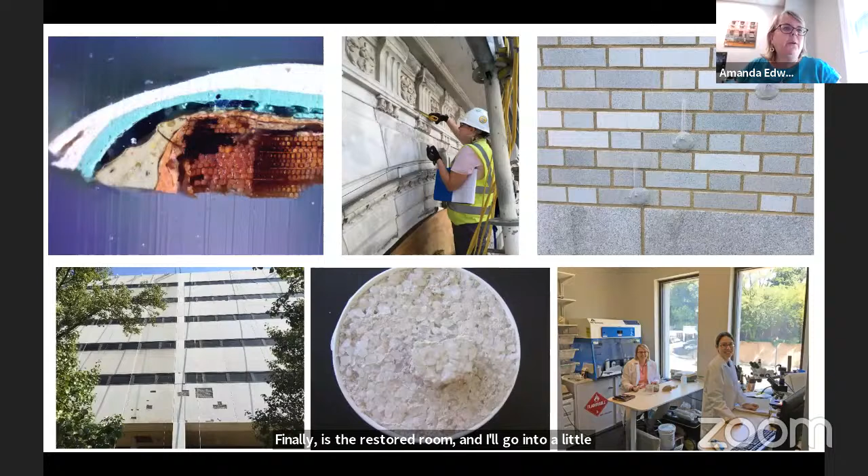So what kind of testing do we do in this hands-on investigation? Paint analysis is a fun one, and I'm going to give you an example of one of those projects where we're taking little cross sections of wood trim or various plaster elements to try to understand the history of paint and what the room could have looked like when it was first constructed.

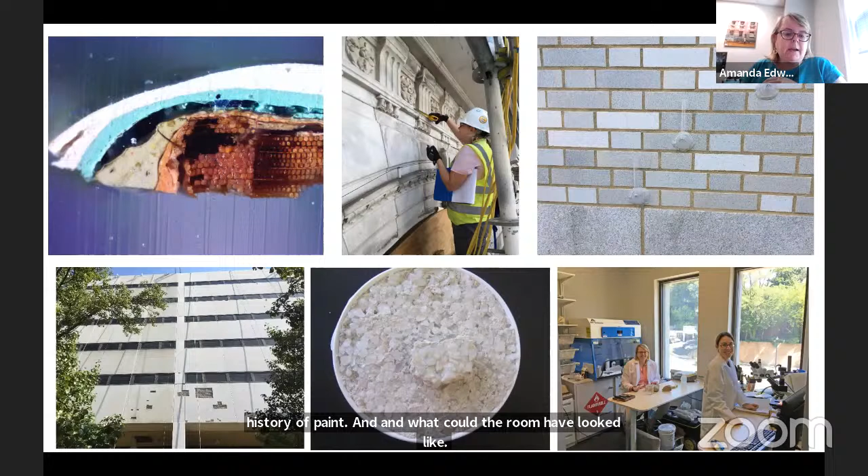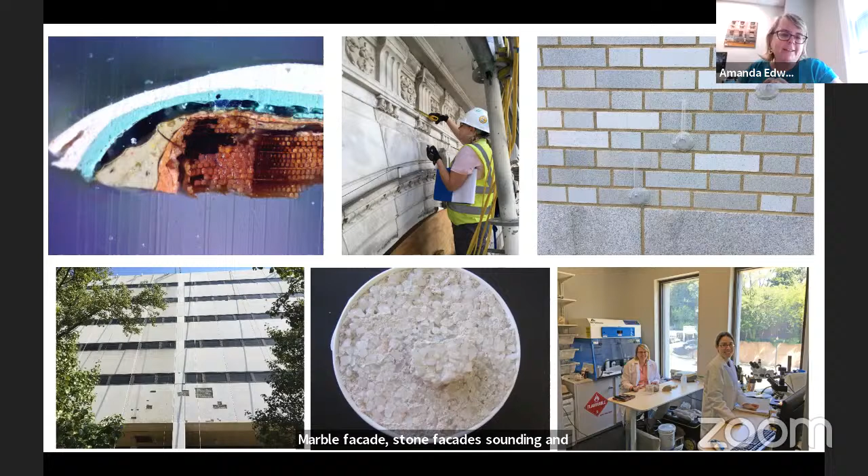We also do a lot of building survey, so I'm out on marble facades, stone facades, sounding and counting cracks, as they like to call it. We also do things like RILEM tests, where we're looking for permeability to understand how that mortar functions within the wall, how the bricks are functioning within the wall.

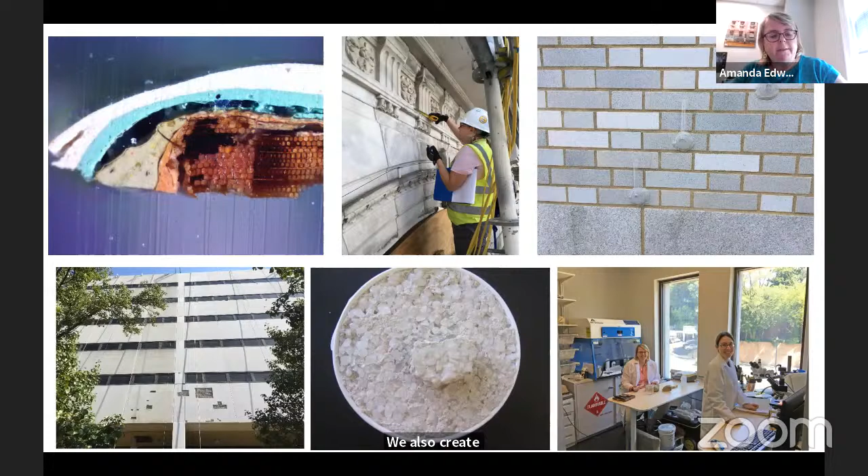We also create patch protocols. So this in the lower left is an example of an exposed aggregate building, and we were able to create a patch that matched it almost exactly so that you couldn't see all of those interventions that we had to make. And then I'm lucky that we have our own lab, so we can do some of this in-house, in our everyday office.

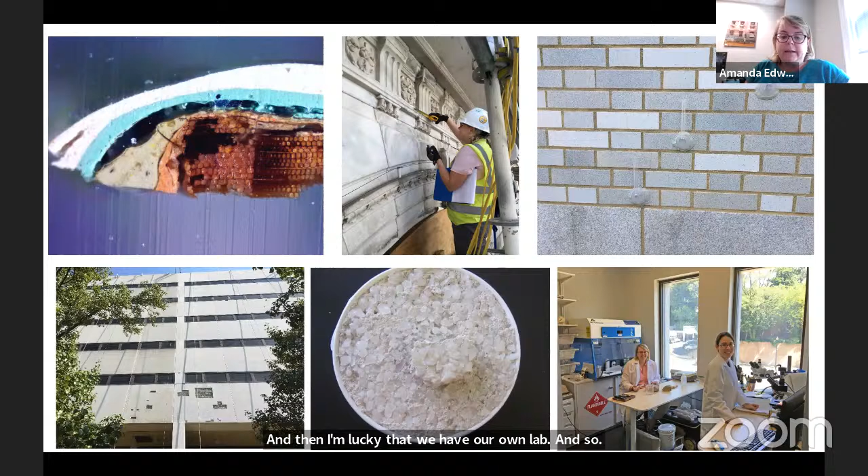So I wanted to start off by being local to Arkansas. The preservation director in our office is from Arkansas and has brought us out there to do a couple projects.

Leonard Wilhoff had worked as a baker in Van Buren, and the house that we were able to work on was a dog trot house that we think was constructed somewhere in the 1840s.

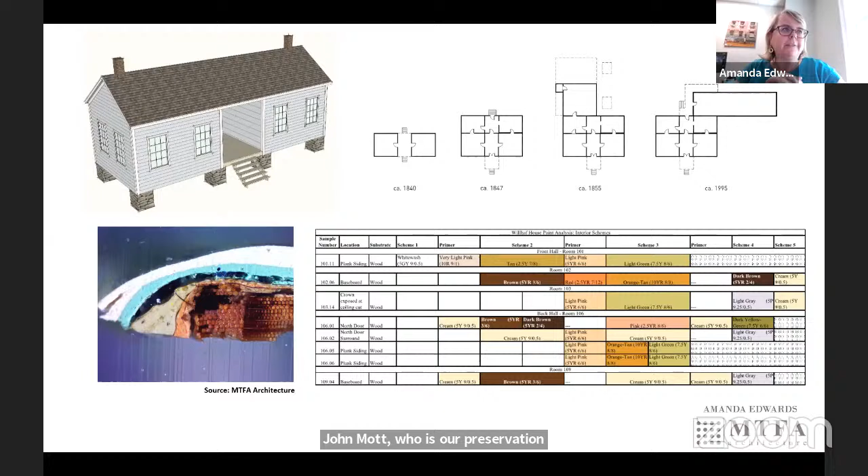So John Mott, who is our preservation director, worked tirelessly to try to understand the evolution of this building. And he asked me to do the paint analysis, which served a couple of different purposes. One was to try to figure out this evolution.

We were able to use paint layers to try to date whether these two rooms were contemporary with each other. Did they have different paint that told us that maybe one was earlier or one was later? And then also the paint analysis would help inform what the building's original design might have looked like.

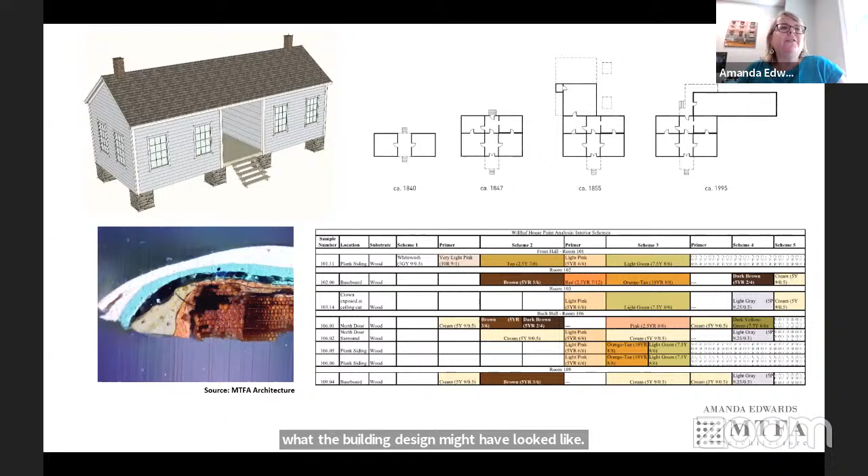So there was a complicated evolution from 1840 with the true dog trot. Then there were additions that were put on, and then even further in 1855, there was an L added. That L was removed, I think, in the 1950s. And then there was this other parallel L that was put on in the 90s, which has now since been removed. But looking at the paint analysis, I want to show you, let's see if I can get this to work.

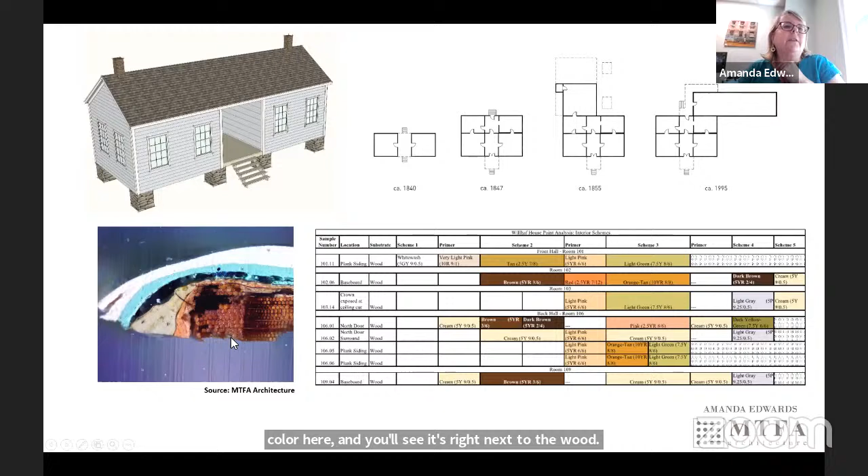Point you to this nice bright pink color here, and you'll see it's right next to the wood substrate, helping us understand that it's perhaps one of the first colors that was used on the building. And then here you can see the different schemes that we identified for various elements.

So this is what the restored building looks like now, and yes, it is that bright orange color. This isn't the earliest color, but we felt that it reflected the color of the building when it was in its current form—so probably about the 1860s, when it got to this shape. That's just a fun example local to Arkansas that I thought I would share.

So talking a little bit more about paint analysis, because this is fun. The process is really, you go out and take little samples from different elements, whether it's wood trim, plaster, brick, or whatever needs to be analyzed.

We mount them into these resin cubes and polish them, and then we look at them under the microscope, and we're able to define the different stratigraphy or layers. From there, after you look at a bunch of them, you can try to decide if there's something unusual, any kind of decorative treatment that we might want to see. And if there is, then you would do an exposure window where you gently scrape away the paint and try to see what that original finish may have been.

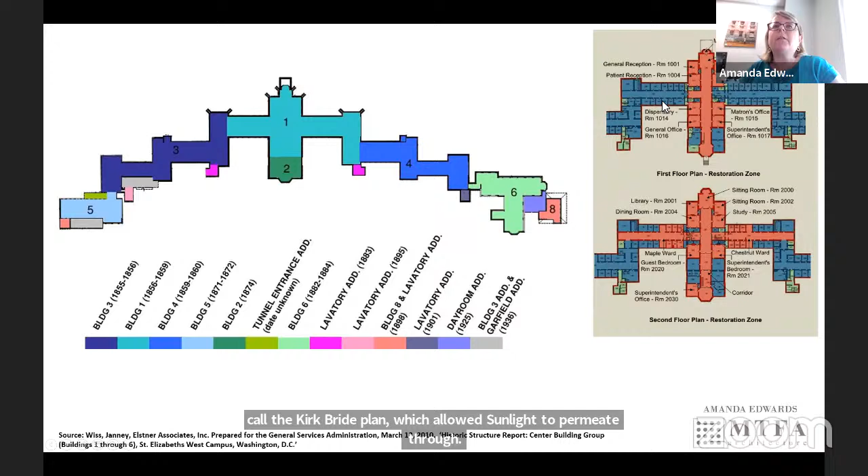And here's this footprint, and it has what they call the Kirkbride plan, which allowed sunlight to permeate through all of the wings. Each of these little rooms are patient rooms, and so it was seen as a way to provide a comfortable environment for all of the patients.

But the Department of Homeland Security says we can't have that many little offices, and it was also determined that the existing structural system couldn't withstand the new program they wanted. So here's the evolution of the building: it started in 1855 in Building 3, then Building 1 by 1859, to Building 4 in 1860, back to Building 5. Then in 1874 this new end of the building was added, and eventually around 1900 the full form was developed.

So all of the preservation regulatory agencies got together and said, okay, if you can't use the interior of the building, we at least need to save the shell. And this is what happened: the entire exterior was preserved and supported while the interior was completely taken out.

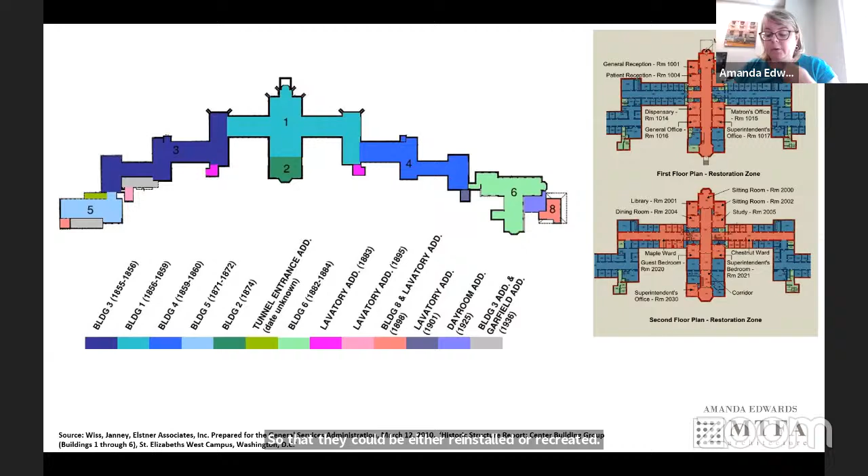Going back for a second, my job was at this intersection of the building, designated in red as a restoration zone. My job was to help remove all of the historic trim, doors, and windows, and to help understand the different plaster finishes so they could be reinstalled or recreated in this zone. Part of that was doing a paint analysis so this section of the building could be repainted to match the original design intent.

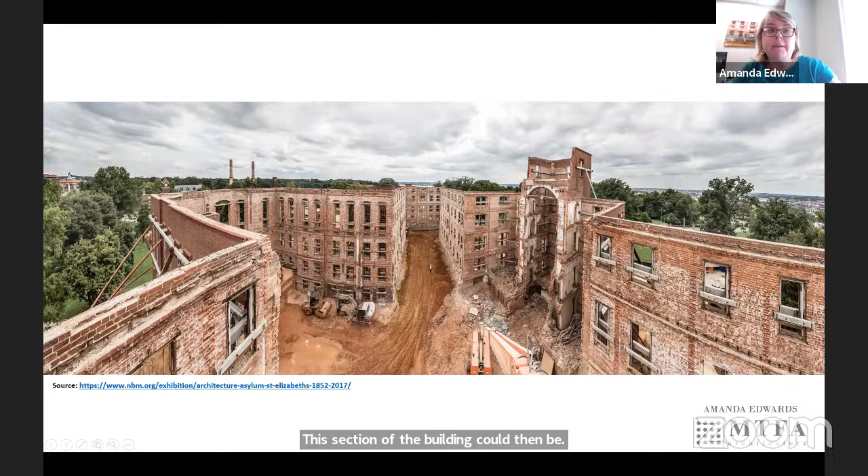So it was very overwhelming, a little daunting, but we had a little help. There are great photographs from 1905 that showed what the interior of the building looked like, and you can notice areas of stenciling and wallpaper. This is what the building looked like when we did our survey and paint analysis — it had been boarded up for many, many decades at this point.

So we started on the paint analysis, and there are a couple things I look for. One is a benchmark. This part of the building was done around 1859, and this one in 1874. But these inner samples from Building 1 and the outer samples from Building 2 lined up almost exactly, which showed that none of the original finishes from 1860 remained in this portion of Building 1. So we knew everything we were looking at dated to at least 1874.

In other parts of the building we found a specific primer with red and blue bulking agents in it, which we didn't find in the 1874 building. That helped us identify that this was older, perhaps related to the 1859 finishes. And indeed, you can see this primer and then the brown of the stencil from this area — so we know that was an early finish.

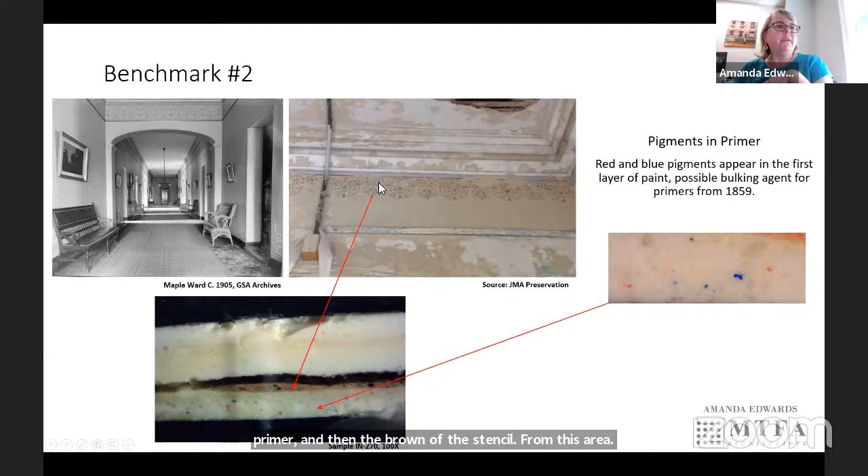In some of the rooms there was a lot of decoration, and the remaining paint and fragments showed different eras — we had stenciling, wallpaper, and full flocking of the walls. This paint sample shows all those layers: the blue stencil, the wallpaper, and this red layer. All of these things, with the help of the photographs, helped us understand what we were looking at. This wallpaper dates to the era seen in the 1905 photographs — so those are some of the things we use to date our analysis, which is pretty cool.

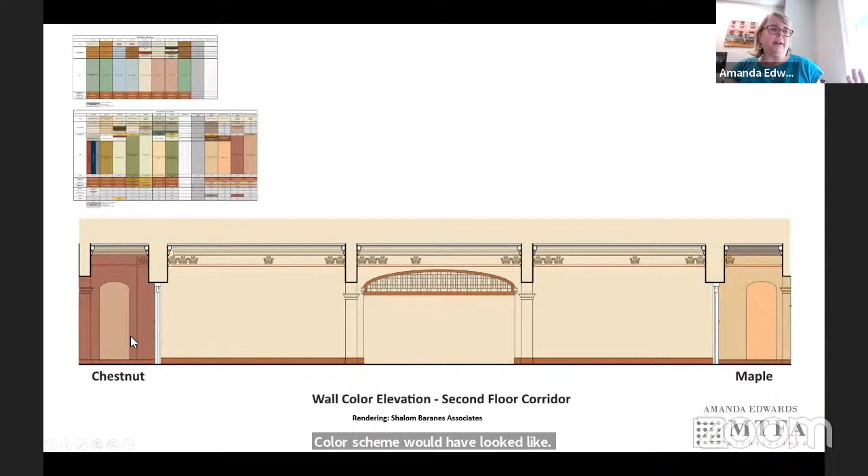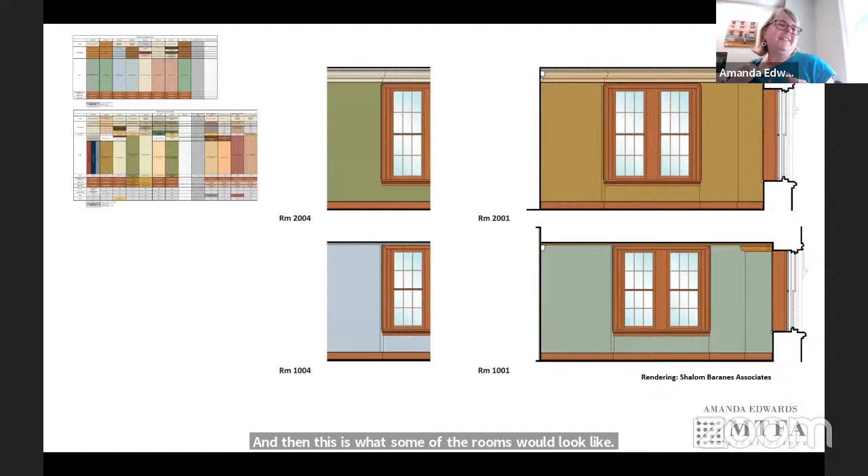Okay, I'll speed through this part now. We got all the color palettes for that center cross of the building from 1859, and each reflects different rooms — focus on these pink and mauve colors here. This is what we determined that color scheme would have looked like. Each wing had a different color scheme — this is the chestnut wing, this is the maple wing — and this is what some of the rooms would have looked like, these beautiful mid-19th-century jewel tones. Once you see it, it makes sense when you understand the trends of the time.

So, funny story — I was talking with my neighbor, who was a Capitol Hill staffer, telling her about this paint analysis and some of the things I was finding. She said, oh, they're doing some restoration of the Brumidi corridors in the Capitol.

You should come for lunch and we'll check it out. And I was like, oh, I would love to do that.

It turns out that T.U. Walter, who was the architect of the Capitol at the time these corridors were being painted, was also in charge of building St. Elizabeth's.

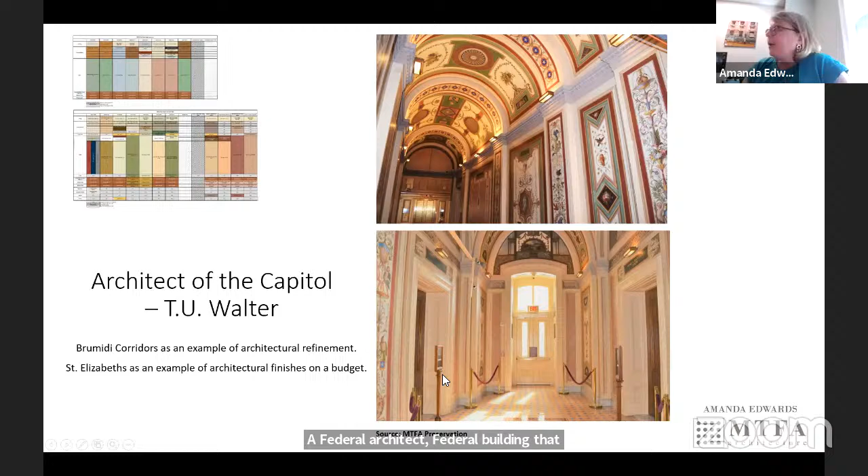What I determined, because I had done the paint analysis at this point, you can see these pinks and mauves and greens and blues, and when you look at what was done in the Capitol, it's all the same colors, just a different level of refinement. So this is something done with great artistry and flourish in one of the most important buildings in the country. Then you take those same colors and do a simpler version for a federal building that was done on a budget. I think there's probably a lot more to unpack there, but I thought that was really interesting.

Some more samples that we found. This is the exterior. This is a sanded paint that was intended to look like stone. We determined it was found on all of the trim and the cast iron, and we were able to recreate that finish in our lab. This is what the final product looked like, and you can see how close it is to the true brownstone trim that exists on the building.

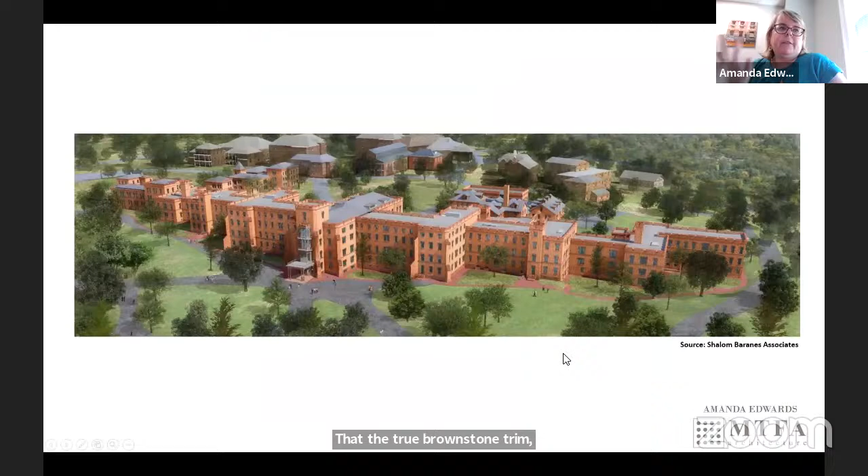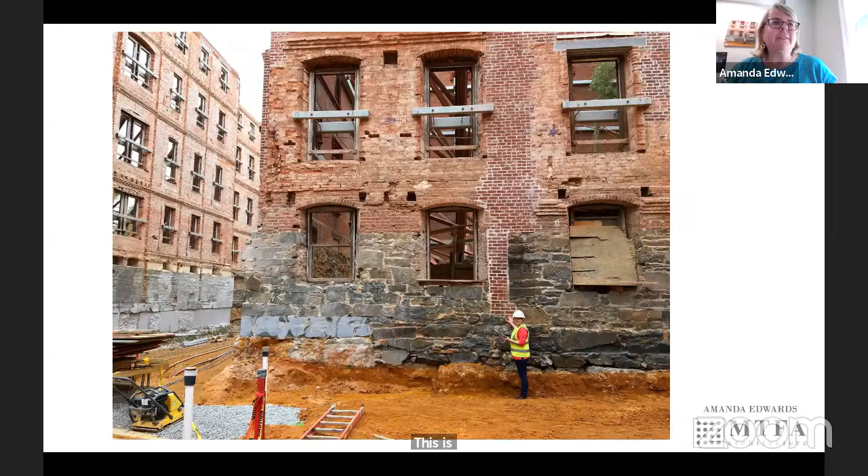Okay, now I'm going to talk about a different project, one that's close to my heart. This is the Folger Shakespeare Library, a project I've been working on for a number of years. It's a stripped classical building, designed by Paul Philippe Cret in 1932.

We were contacted to help clean the exterior of the building to get rid of black staining around the perimeter. We had lots of different theories. It turns out there was lead-coated copper flashing at this level. The lead had worn off and the copper was exposed to the elements, so the black stain you see is actually all copper. It can turn purple over time, starts out green like everybody knows, but indeed it can turn black.

So we did a really intense hands-on investigation to understand how we could clean this building, and how we could do it over the entire building, not just one little area. We started out with poulticing, which would be the common approach, and we got zero results. Then we tried misting to open up the pores of the stone so it could receive the treatment better, but it still wasn't doing everything it needed to do.

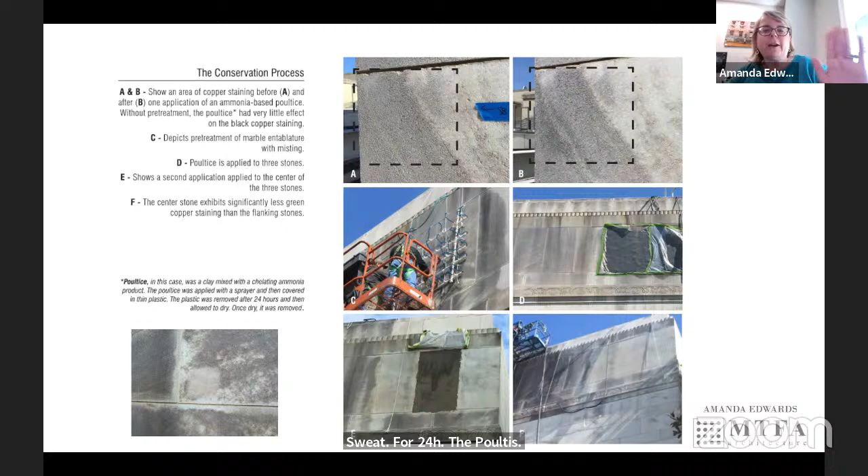From that little tiny square, I said, okay, I think we can do this. Then we started to apply it to the whole building, and created a spray system for applying the poultice material. We determined it needed two applications, needed to stay wet for 24 hours covered, then we needed to take it off and let it dry for 48 hours and then do it again.

Here you can see the success, this is a cleaned area and this is the stained area. We were really able to get it all out, and it was just incredible. These are some of the photos of our different levels of testing, trying all different kinds of poulticing chemistries to see what was going to work the best.

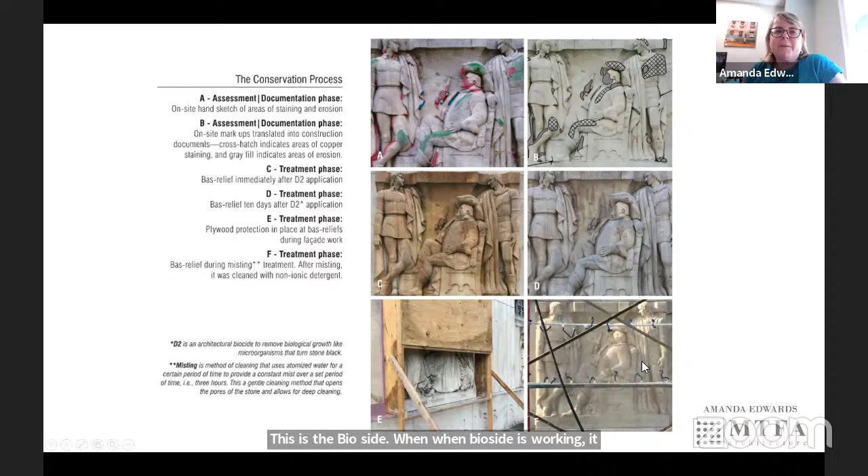And this is what the stone looks like under the microscope, stained and then cleaned. We also did some work on the bas-reliefs where they had been treated before and consolidated in various areas. All of this stone is Georgia white marble, and they were not this orange. This is actually a treatment - the biocide. When biocide is working, it turns bright orange, but eventually it gets to be clean. So don't freak out if your stone turns orange when you put some D2 on it.

And this is the final result. So here we have the sequence: the historic 1932 image, the stain from when we started, halfway through where we realized that we had a winner on our hands, and then the final result, which was truly remarkable.

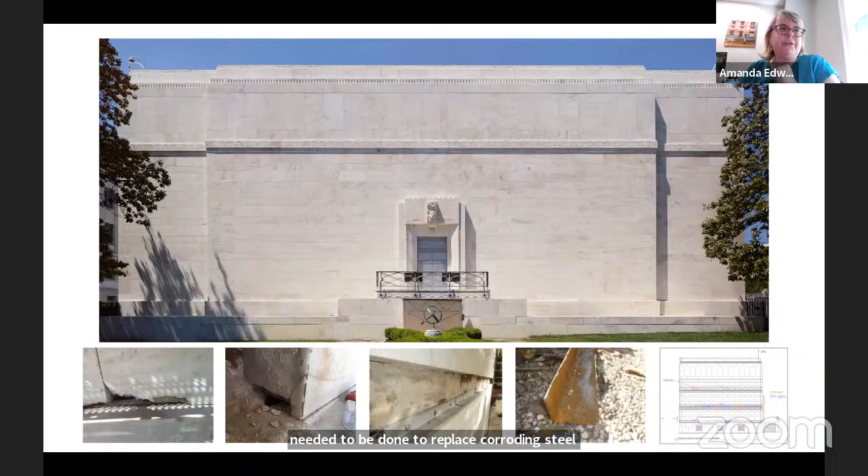We did a lot of masonry repair also. There was some work that needed to be done to replace corroding steel shelf angles, but that's almost a whole nother talk. You can't tell, even in this photo, how much strategic stone removal that we did. We removed whole swaths of this, but we put it all back in areas to match the existing coursing, and we salvaged as much as we possibly could.

So then, after we had the building pristine, the Folger decided to embark on their new museum project. So if I go back a few slides to this terrace, they decided that they wanted to open this space up for their new museum space and provide some accessible entries.

And this was really nerve-wracking because I had just restored this whole building. And then they opened up, they trenched this all out, and they were supporting the entire facade on these jacks. They did an incredible job, very little damage - I mean, no damage, but very little movement to the joints that we just repaired. Really an incredible feat. And then we put in this protection of the bas-reliefs so that they were breathable, but protected from any impact from the construction.

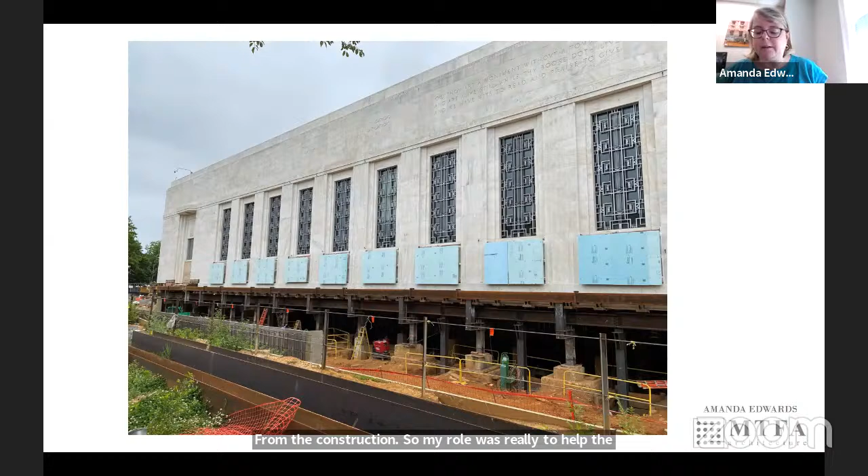So my role was really to help the owner protect the existing historic fabric. And one of the cool things, this is a close-up of those jacks, which is amazing.

One of the cool things that I got to do was go to Vermont and help pick out new marble for the terrace. The existing marble was not reusable for the most part, and we found a good stone match in Vermont. We went up there and selected different stone blocks based on their level of veining that we thought would match. And then once all the stone was cut to size, they laid out the entire terrace.

We also did a lot of work on the interior. The Folger has incredible Elizabethan inspired interiors, which again is a whole nother talk, and if you're ever in Washington, I encourage you to come visit. We did a lot of work on the aluminum and stained glass windows, as well as a lot of aluminum trim around the whole building.

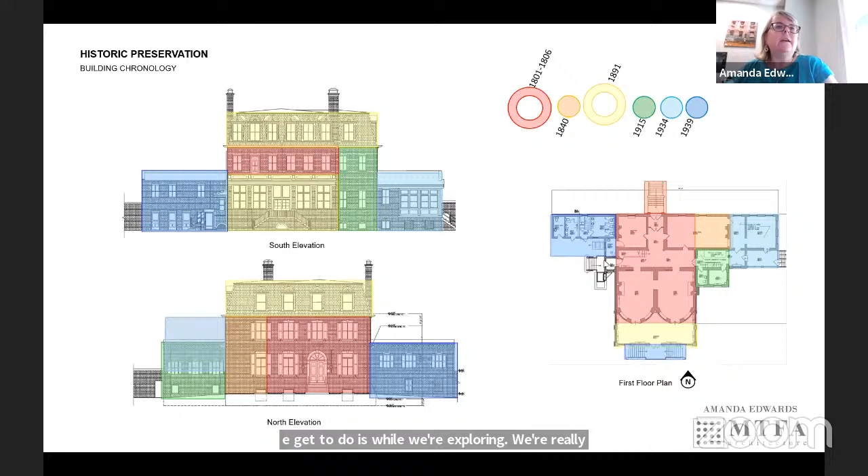So to get to the conservation part of this, we are in the basement of the building in that red historic core, and we noticed when we were investigating for all of the different upgrades that were going to happen to this building, that right above this ceiling tile, there was a lot of brick dust, an excessive amount of brick dust. Here, I'll show you the picture. Where did this brick dust come from and what was going on?

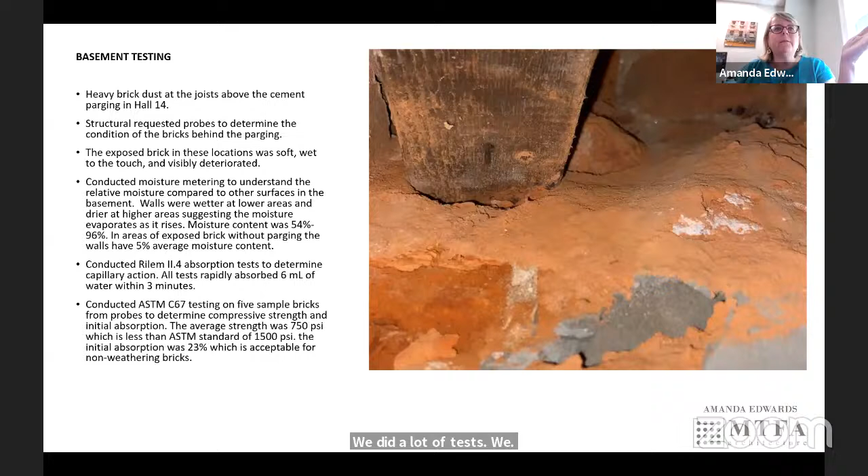So we did a lot of tests. We opened up the walls and we found that we had known that there was a 1-inch thick concrete parging that was put over these walls as a stabilization effort, actually, to help the structural support.

But what it was doing was actually trapping the moisture, and as that moisture was rising up the wall from the pressure of the coating, it was evaporating right at that ceiling height, where the first point where it could be released. So we determined that perhaps there wasn't really a water table or a damp course that was preventing the water from rising above the water table.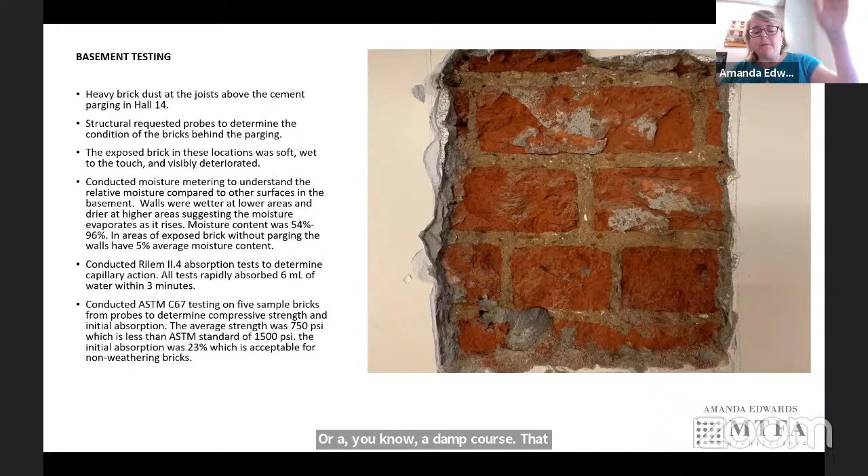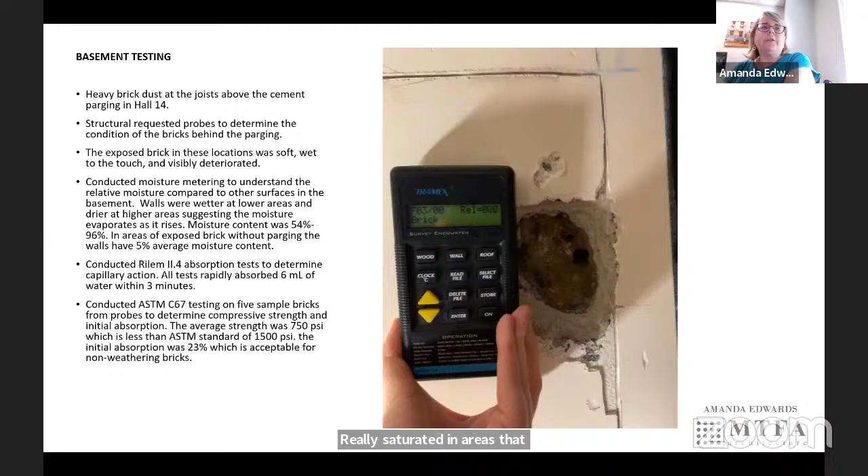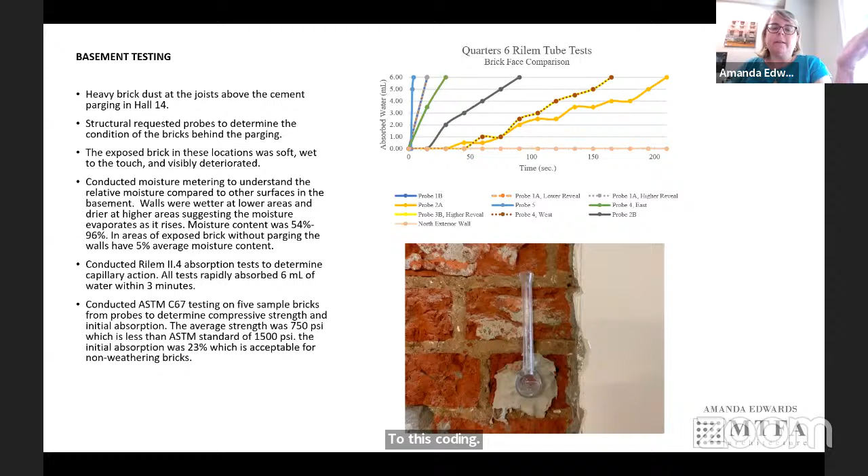We did moisture readings, and we determined that it was really saturated. In areas that hadn't been treated with the concrete, it was really dry. So something was happening that was related to this coating. We did absorption tests. These bricks are from 1801. They are highly absorptive, probably all hand molded, right?

So we wanted to do some geotechnical testing to try to understand if there was any clay under these walls, or what was the soil content at the foundations. And we indeed found clay, but we also found this, which was a cellar that nobody knew about, that had been filled in. And you can see some of the whitewash there on the bricks.

That led us to a whole nother set of diagnostics and conclusions that we needed to take all of this fill out, get that cellar open back up, and start putting some air in there so that we could dry out this wall, because we can't take off the parging, it would damage the brick.

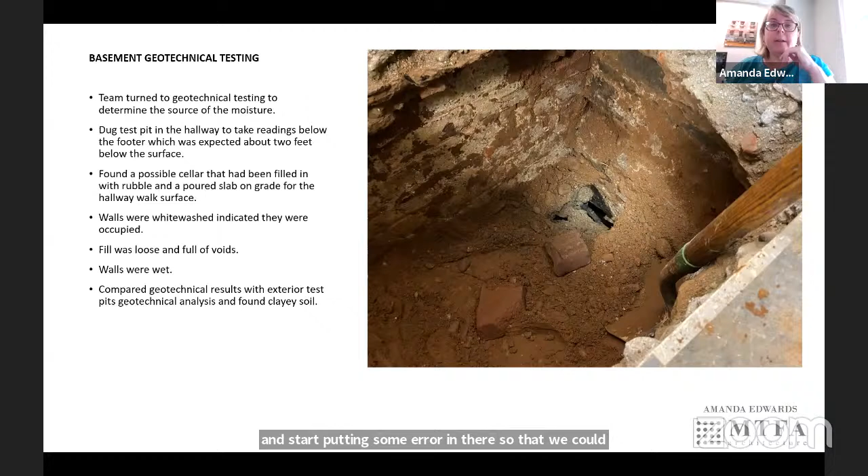So one of the other things that I get to do is help create design details to make sure that the historic materials are treated and as stable as possible. This is a fairly complicated design, but we are installing a pretty cool damp-proof course using bladders in the wall. We've got air systems that are circulating in the cellar region so that we can dry out this portion of the wall. And then we're waterproofing over here to make sure that we're not bridging anything with any new soils that are put in.

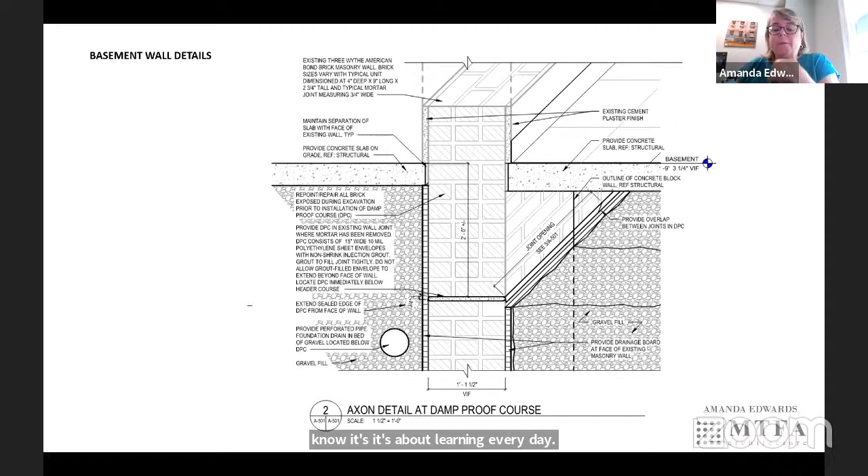Just some of the wide range, from paint analysis to building surveys to architectural details. It's just been pretty incredible. Again, I would say that it's about learning every day, something new, something that you didn't know before, that really propels my interest in my career.

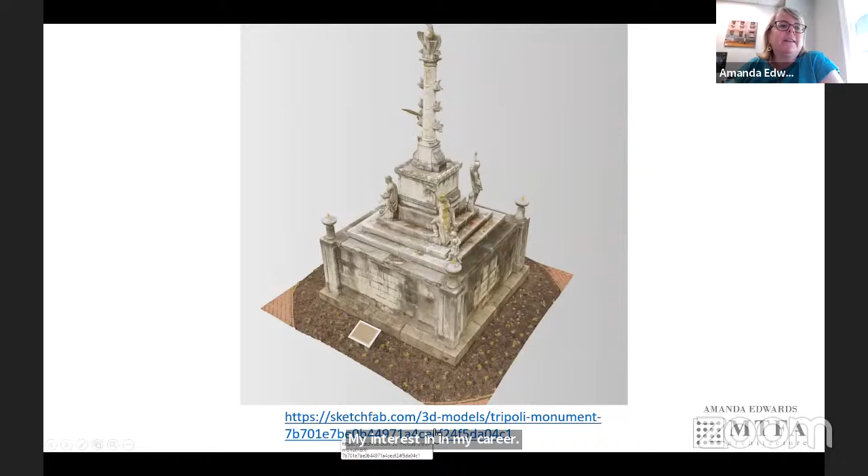And then I'll just end with this. Hopefully this is going to work. Let's see. Can you guys still see my screen? Yeah.

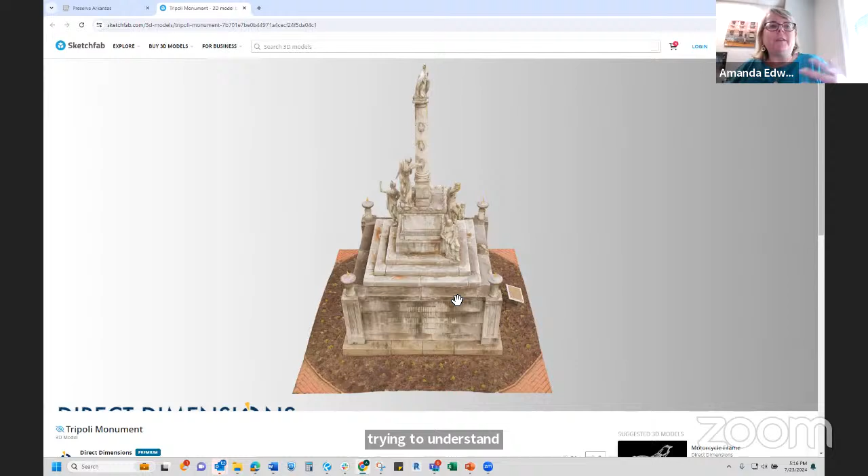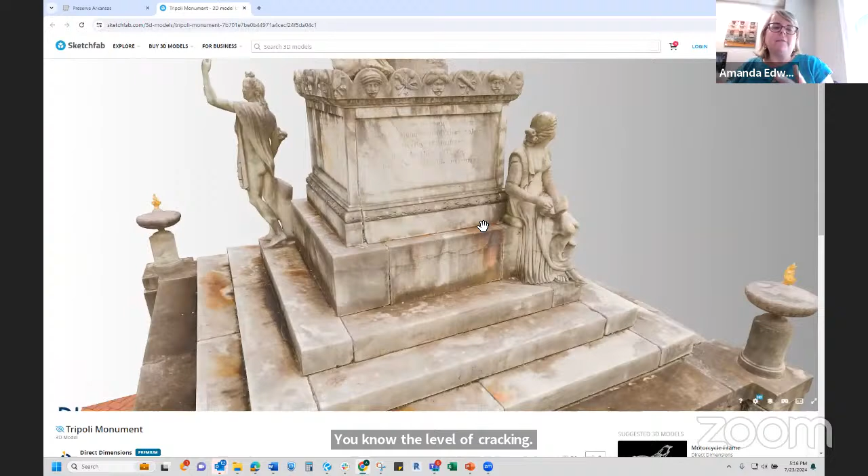Lately we've been working on a number of different sculptures, trying to understand the latest technologies and how we can use them for preservation. With Direct Dimensions, we had a laser scan done of the Tripoli Monument at the U.S. Naval Academy. This is an incredible tool for documentation. I can zoom in at a really high level of detail, so you can see all of that carving, the stains, the level of cracking. Right now we're working on three or four different statues. It's another whole new area to learn about, to see how we can keep these structures for many more generations. I think that's it for me.

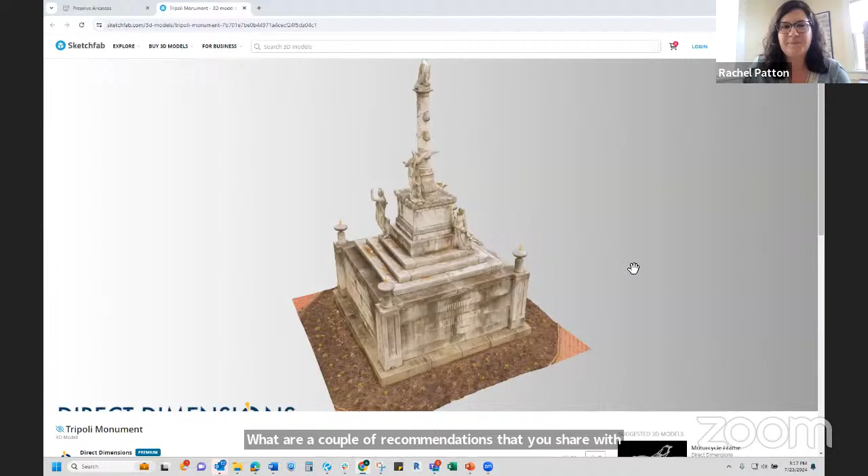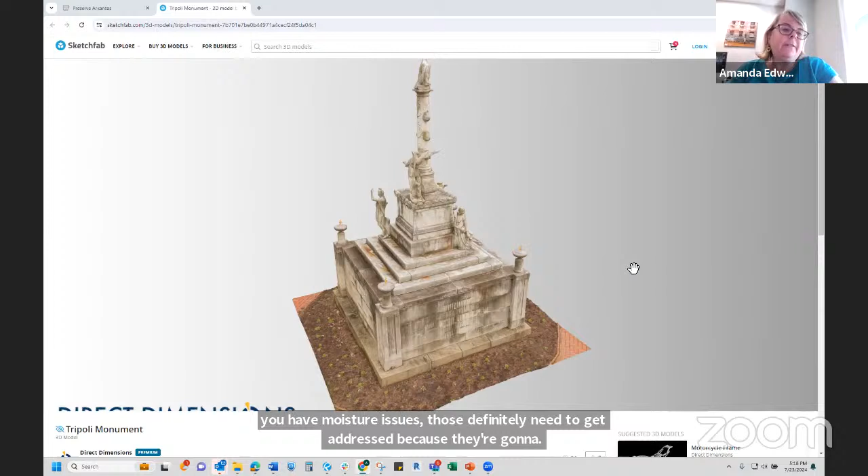Okay, here we go. A question: what are a couple recommendations that you'd share with an owner of a historic building before they start making alterations? Just a couple - it really depends on each one, but you want to understand what your building materials are and know that compatibility. Making sure that whatever you're using isn't going to cause more damage to your materials is one of the most important things. It really depends on what the issues are, but if you have moisture issues, those definitely need to get addressed because they're going to cause more problems in the future. If you're making alterations, you want to understand your structural system, make sure that it can handle it, and really understand what's old and what's new, what needs to stay and what could be sacrificed. I think having a good understanding of that decision tree would really go a long way.

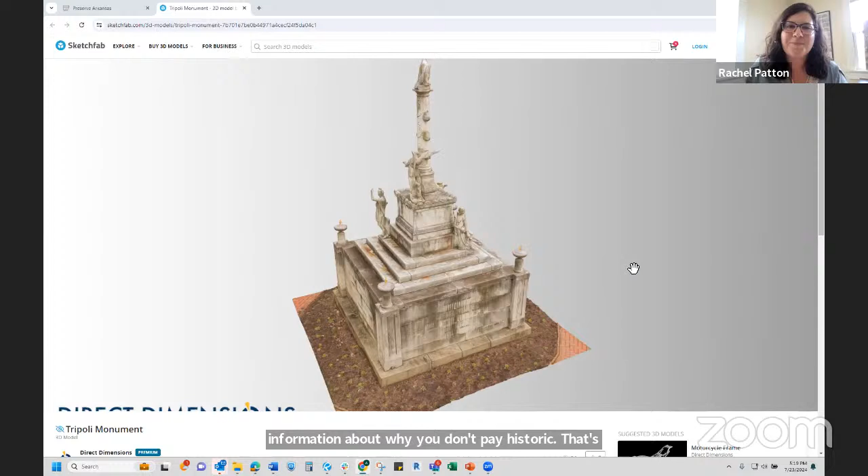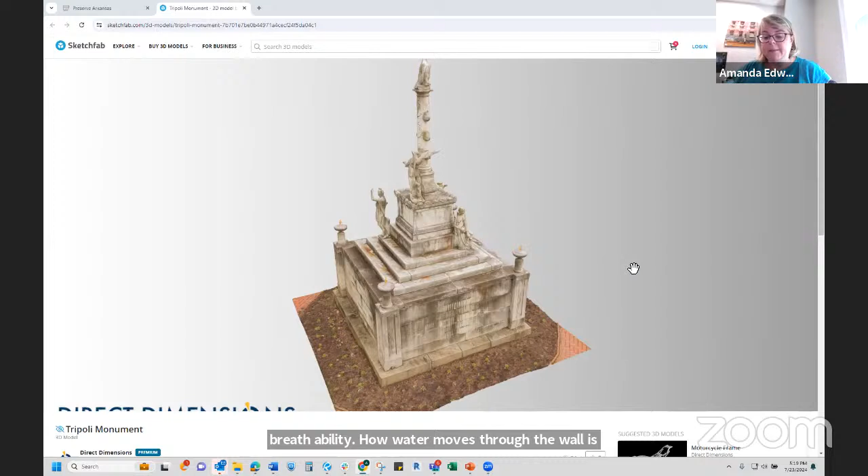Well, in this case it wasn't necessarily bad because it was done as a way to stabilize these soft brick walls at a foundation. I'm not saying it was the wrong choice - I am saying that it caused unknown, unforeseen conditions that then had to be dealt with. Typically, you don't want to put hard Portland cement in your joints, or anything that's going to affect the breathability. How water moves through the wall is super important, and really hard cements are not breathable. Therefore all of the moisture breathes through the bricks and stones you're trying to save, which causes the damage. Having breathable mortars is certainly much better. Add a structural component into this, it gets a little more complicated, and I'll let structural engineers weigh in on that. But in this case, what we determined was that you really needed to dry these walls out so it wasn't damaging the walls by moving that moisture up and causing that disintegration. That was not good.

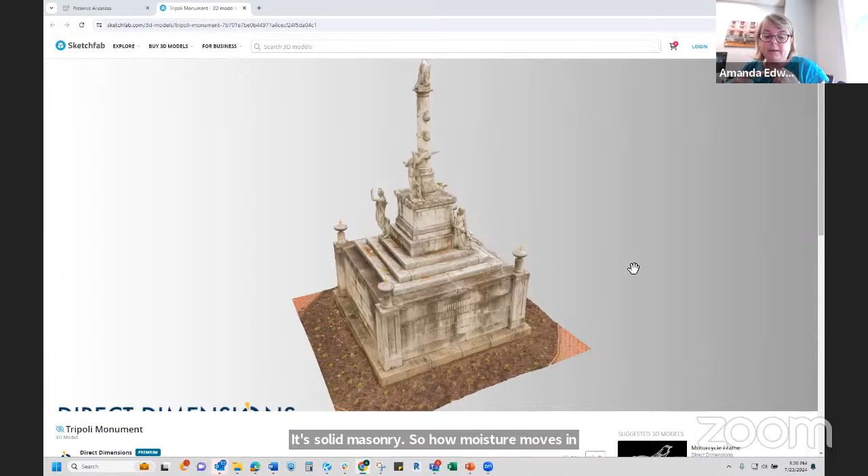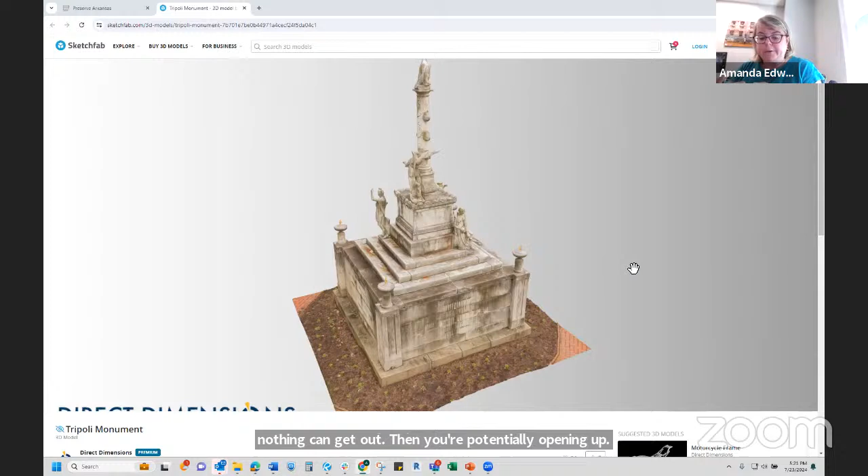In terms of painting bricks that have never been painted, it goes a long way to the whole sandwich of the wall system. You need to understand, again, is there a cavity wall? Is there not a cavity wall? Older structures don't have cavity walls, it's solid masonry, so how moisture moves in and out is really important. In our climate, in the mid-Atlantic, we have a lot of freeze-thaw. So if you trap moisture in that wall and then you paint it and nothing can get out, then you're potentially opening up for brick spalling because that moisture is going to freeze and pop. There are plenty of breathable masonry coatings out there that can be used and done in a compatible way. So it's not to say that all paints are bad - it's really just understanding.

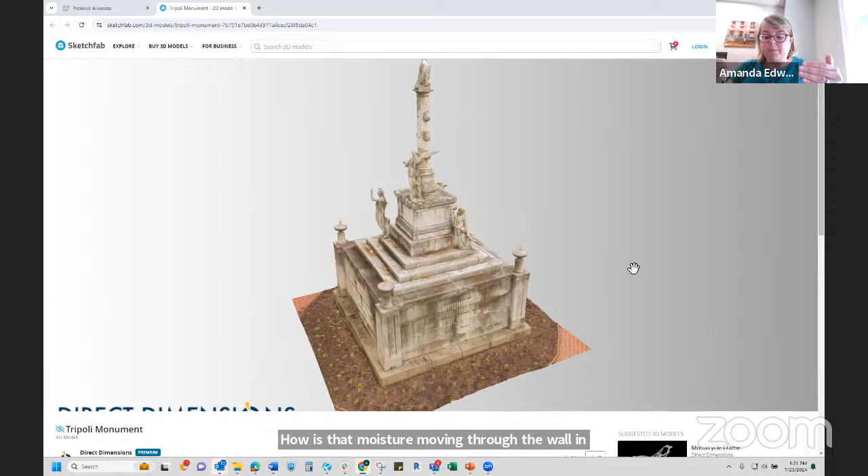It's complicated. It's about your exterior environment, your interior environment. Is it climate controlled? How is that moisture moving through the wall in such a way that it won't cause damage if it comes in, or won't cause damage if it goes out, and you're stabilizing that wall structure, before you add things on it that would impede how that moisture moves.

So everyone knows, if you're interested in historic preservation, there's a nationwide shortage of craftspeople who are trained to do historic preservation. How does that impact the work that you do? Whenever you make your recommendations for conservation measures, do you have a problem finding contractors who can do this?

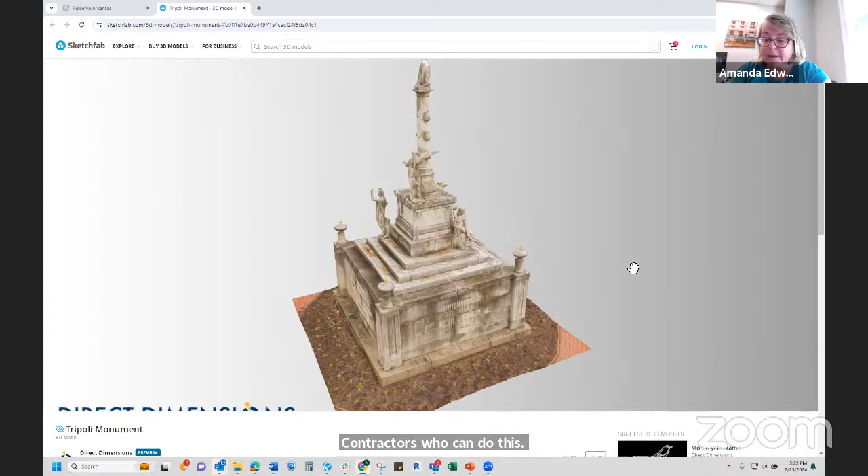In a large metropolitan area, it's a little easier, but I like to learn every day, and a lot of that is learning from contractors when I'm on a construction site. So doing construction administration, I'm learning from them sometimes what's the right way to do it, and then I'm taking that knowledge and passing it on to the next person that I work with that may not know that, or putting that information into my documents. One of my favorite things to do is walk with the contractor before any work starts.

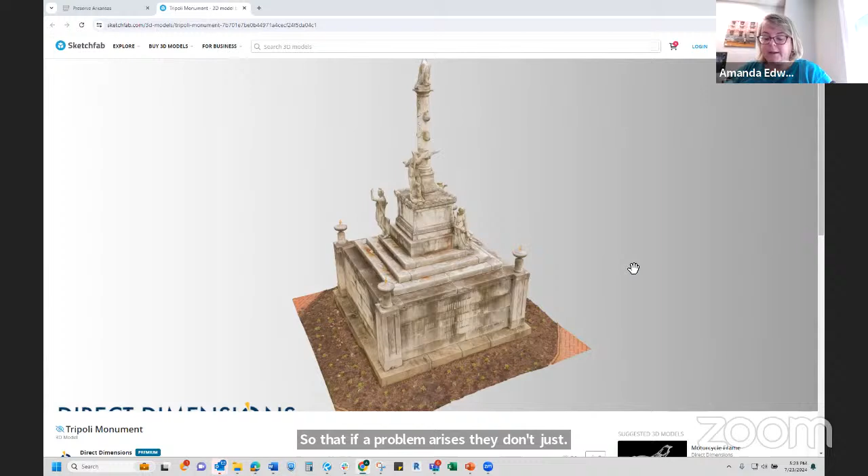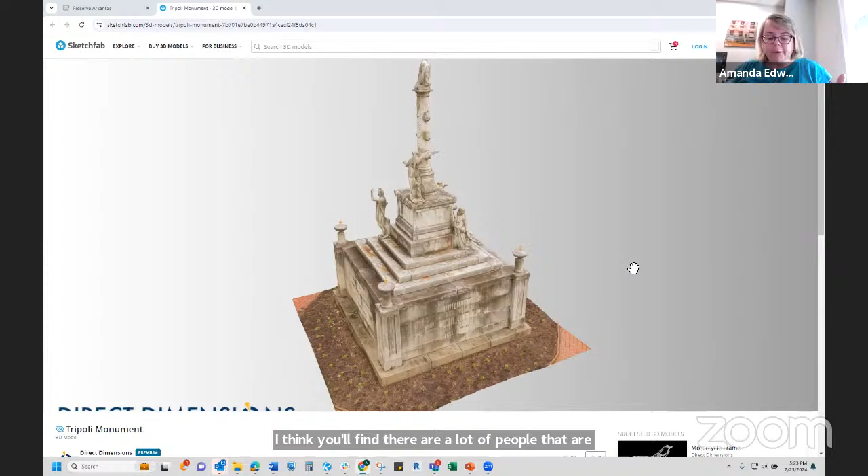We talk about the methods and the process, and build a level of trust so that if a problem arises, they don't just hide it, but we address it and try to figure out the right way to deal with it. I think as long as tradesmen maintain that level of curiosity and seek to learn how to do the right thing, you'll find there are a lot of people interested in pursuing careers that way. If you're working with contractors under the pressure of schedule and budgets, it gets a little more complicated, and it's really about sharing knowledge as much as possible to help them meet their goals.

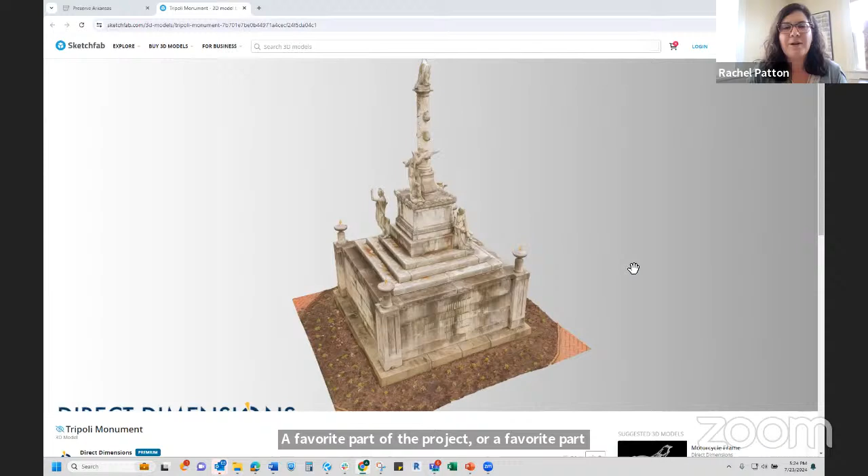You have some more comments, which I'll send to you. But I loved the tour we went on of the Folger Shakespeare Library in March. Thank you again for taking our preservation action group through back in March. There were obviously many challenging things about that project, but do you have a favorite part of the project or a favorite part of the building? And for anyone who hasn't been there, it's just a block from the Capitol and you have to go see it.

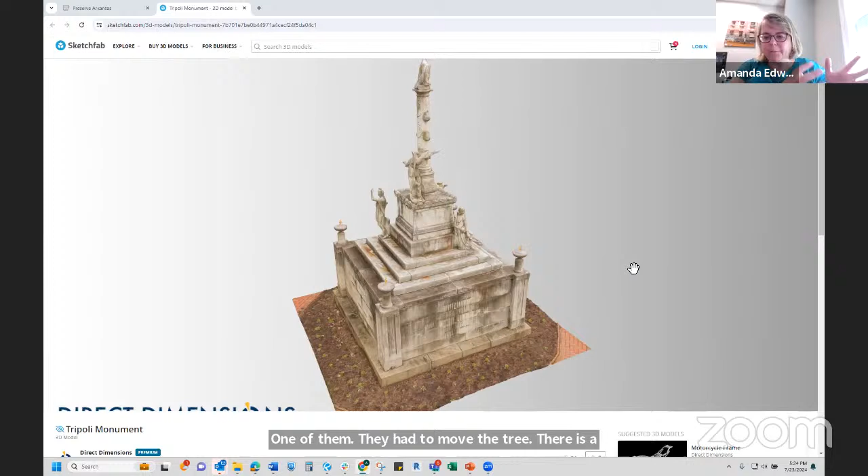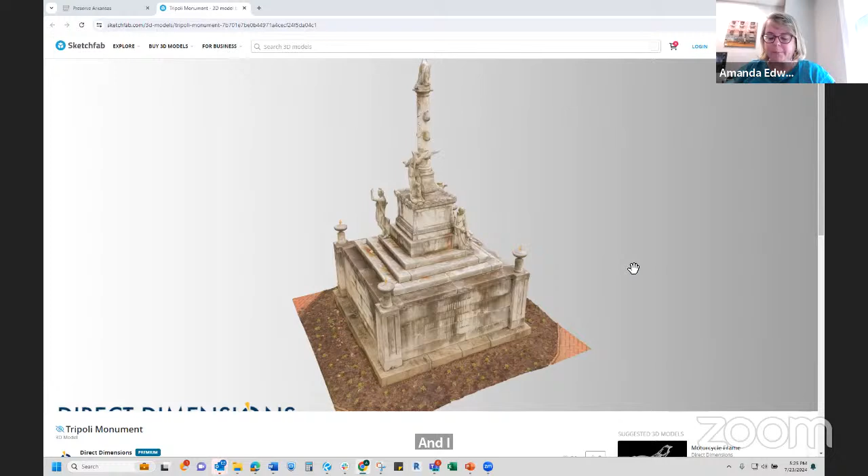Gosh, there are so many challenges. One of them, they had to move the tree. There was a heritage magnolia tree, and they had to move it like 5 feet in another direction so that they could have that underground or below-grade entry. We had to do a lot of work with the fountain. There used to be a fountain on the west side, and I encouraged the Folger to salvage as much of that stone from the fountain as possible. They were able to reuse it and recreate a new fountain in the same space.

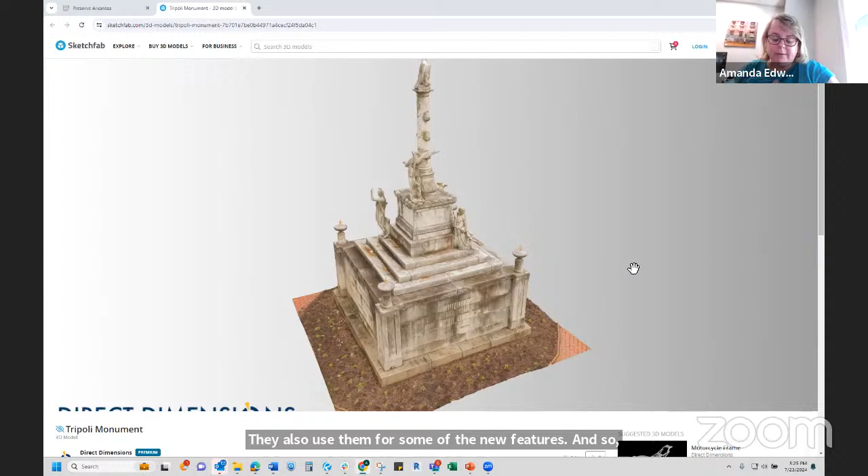But with some of the salvage that they had, they could then repair stones in the future. They also used them for some of the new features. If you have a lot of building material and you're going to be maintaining your building for decades, it's always a good idea to have an attic stock. So that was great to be able to learn.

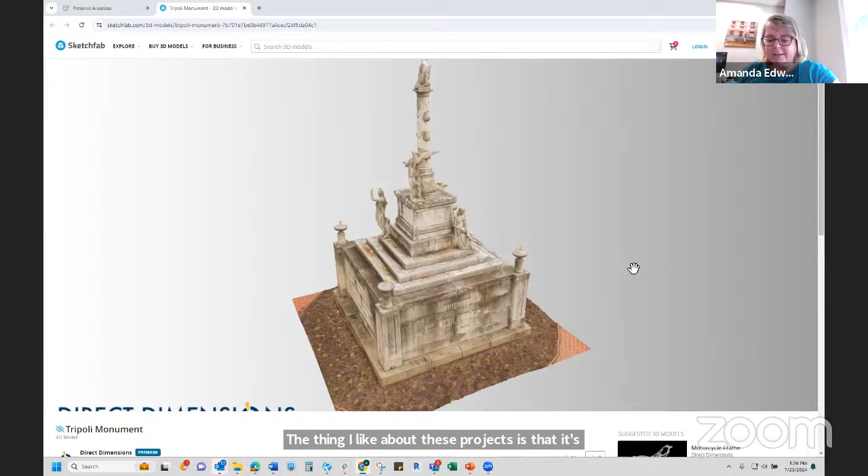We learned a ton working on the windows. They were all custom done with these levers that we understood why they were getting stuck all the time. We were able to undo all of that. The thing I like about these projects is that it's never boring. There's always something different, and it's hard to say where I learned one great thing over another. I just absorb it all. It's really great.